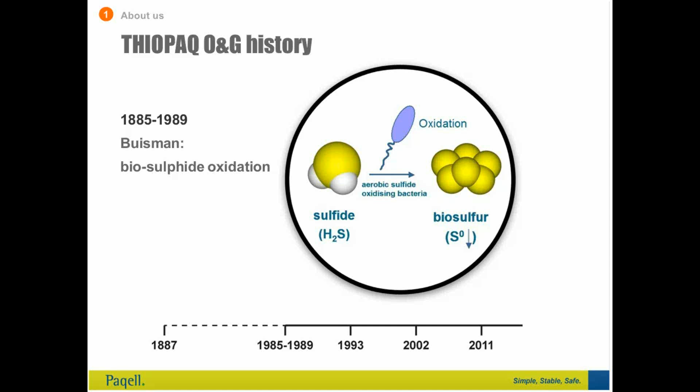In the 80s, the University of Wageningen in Holland researched various types of sulfur bacteria and established that sulfur oxidizing bacteria could indeed live, grow, and multiply off the oxidation of sulfide in a controlled environment.

It was our shareholder Paques that first piloted THIOPAQ biological gas desulphurization in the late 80s, after the Dutch University had established proof of principle a few years before.

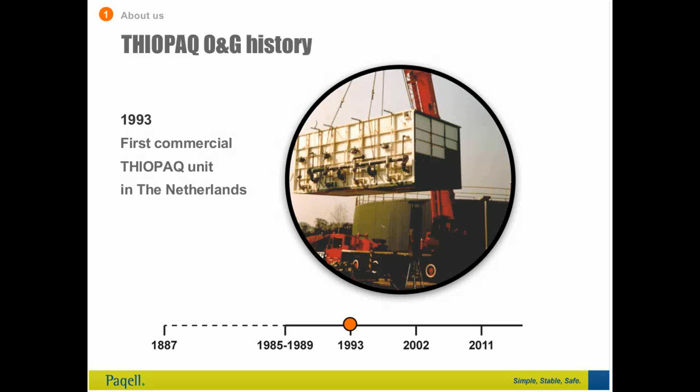Paques had been searching the market for more affordable and easier to operate systems to treat the biogas produced in their anaerobic wastewater treatment units, until they came across this biological treatment option, which they decided to develop into a commercial installation themselves. This picture shows the first crude bioreactor, still rectangular rather than the cylindrical design adopted immediately after.

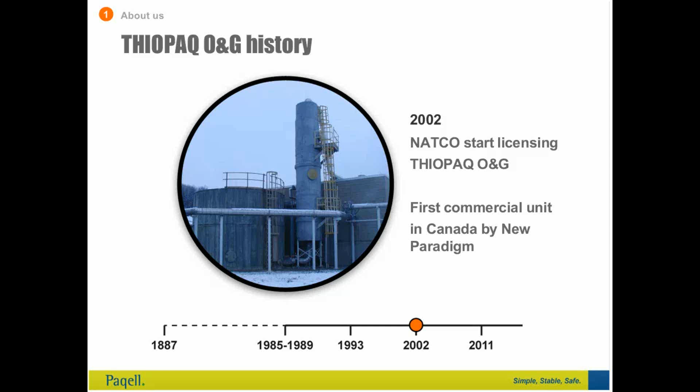Eventually, the first commercial unit on natural gas was taken in operation in 2002. And this picture of the unit clearly shows the insulation blanketing, since Canada can be pretty cold in winter.

Between 2002 and today, the number of THIOPAQ O&G units steadily increased to about 10, with many more in the design and quotation stages.

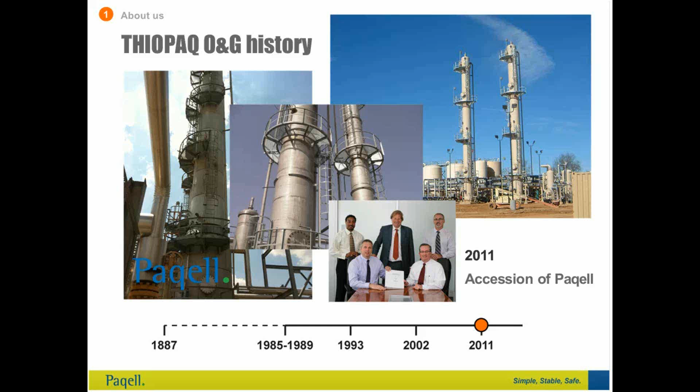The picture in the middle was taken to celebrate the partnership with Cameron in 2011. The same year, Paqell was established. Paqell is located in Amsterdam, the Netherlands, and the reason for its creation was to put more focus on marketing and further development of the THIOPAQ technology.

Now, maybe an insult to your intelligence, but just for those of you who are new to gas treating, the question: why remove sulfur from gas in the first place?

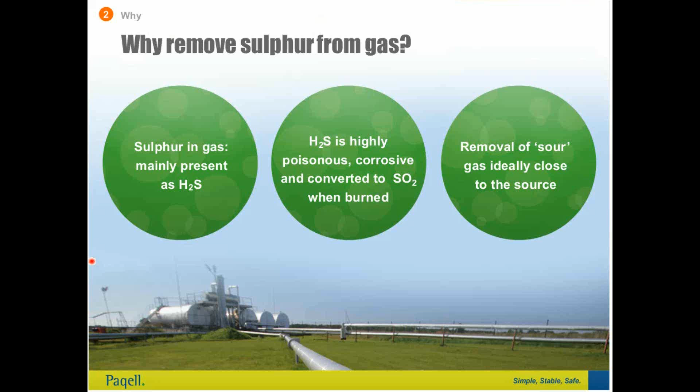H2S is very harmful to people and equipment, and it also means that desulphurisation at some distance from a sour source is very expensive, as more exotic materials must be used and additional safety measures need to be taken.

Most sour gas is of one of these types. Acid gas, of course, could originate from any gas fed into the amine unit in question.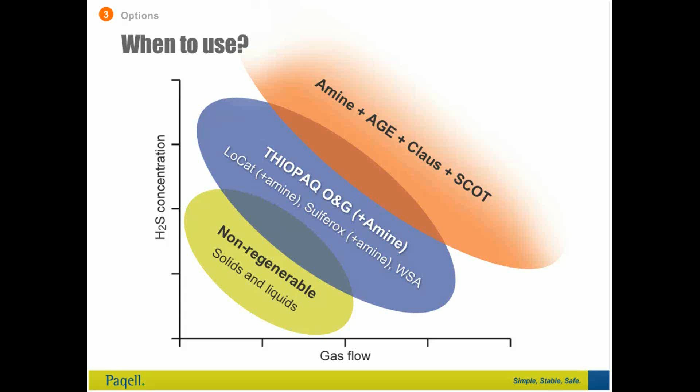Here's some numbers divided in lean cases, that is where the off-gas of an amine unit would have an H2S concentration lower than 30%, in which case a regular Claus burner would be unable to reach a certain temperature.

And rich cases, which contain more than 30% H2S in the amine off-gas, enable the construction of a very simple Claus unit, which really lowers the level at which a Claus-based lineup can be competitive.

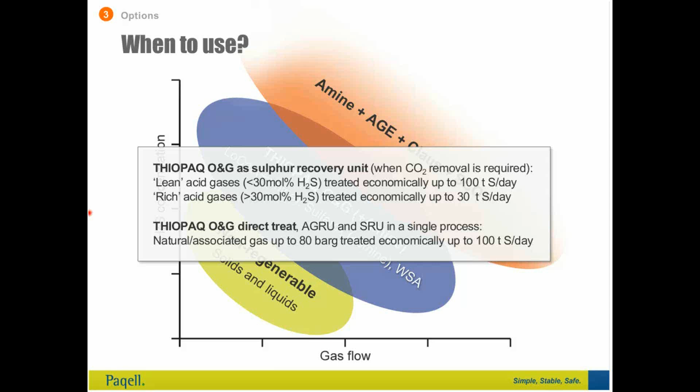For those cases where CO2 removal is not required, THIOPAQ can apply directly to the feed gas, in which case it can be used up to 80 bar and economically up to 100 tons a day.

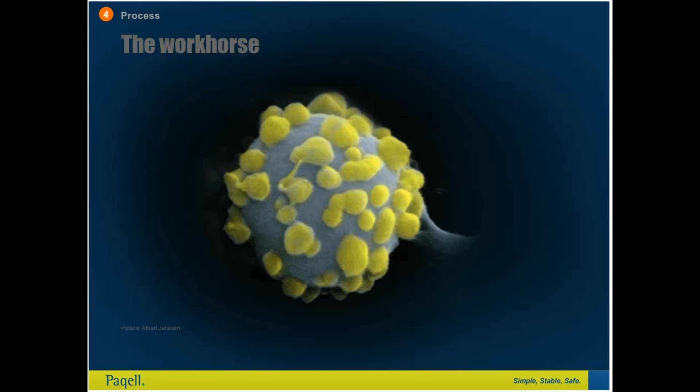The surface of the body is a membrane. They absorb the sulfide through their body membranes and excrete the elemental sulfur. You can clearly see the yellow sulfur nodules on the outside. We've enhanced it a little bit to make it clearer, but this is really how it works.

The process liquid is present throughout the system, and it contains over 97% water. The rest is caustic, sulfur and bacteria. The liquid is basically present everywhere throughout the system.

The system is operated at a pH level between 8 and 9. The H2S is driven into the solution to become HS- sulfide. The action is really similar to what happens in a conventional caustic scrubber.

The sweet gas exits from the top of the absorber and is ready to be used or processed further. The bacteria present in the process liquid are not active at this stage, as there is no oxygen present in the absorption column. They are in fact just passengers coming along for the ride.

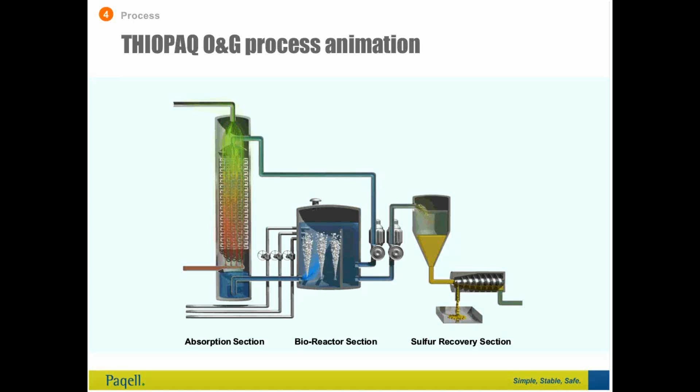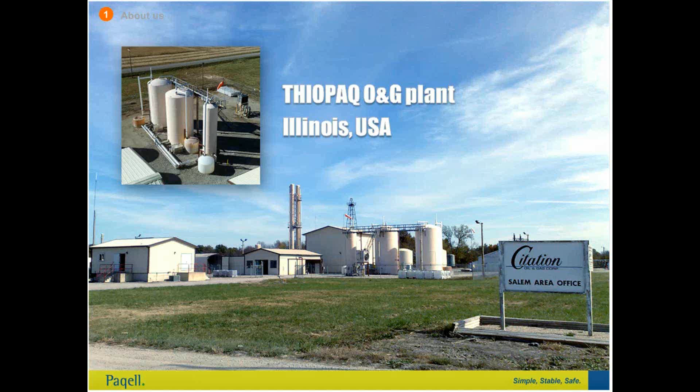As pictures mean more than 1,000 words, here is a THIOPAQ unit treating associated gas in the USA. The load is approximately 1.5 tons of sulfur per day. H2S is removed to less than 2 ppm. Heavier fractions present in the gas are recovered first as NGLs. The methane is sent to the local gas grid. As simple as it may be, this unit actually runs 60% of the time unmanned, evenings and weekends mostly.

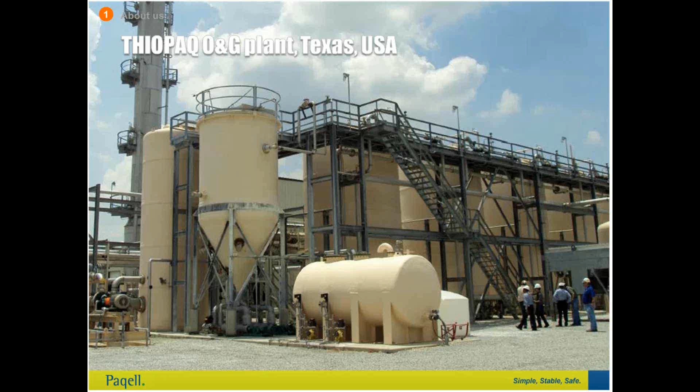This is a slightly larger unit with a design capacity of 10 tons per day. This THIOPAQ O&G actually treats off-gas from an amine unit, as the amount of CO2 had to be reduced before the gas can be sold. For maximum flexibility, a total of 5 smaller bioreactors are used, visible in the forefront.

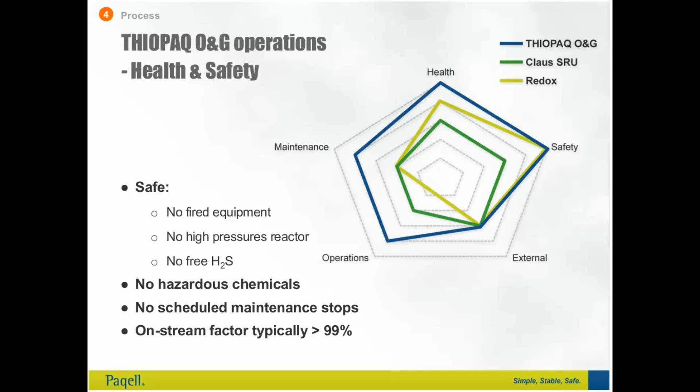About HSE exposure, THIOPAQ operations. Recently, a so-called hazard safety study has been executed to compare the impact on safety and other variables, such as maintenance, operations, and health, executed by a third-party study. It compares other systems, redox, traditional Claus-SCOT lineups, to THIOPAQ, across a total of 5 variables. And you can see that THIOPAQ O&G does perform better, or at least equal, to any of the others on all points. Certainly an interesting outcome, as not all of the reasons to choose a particular technology for a project are purely financial.

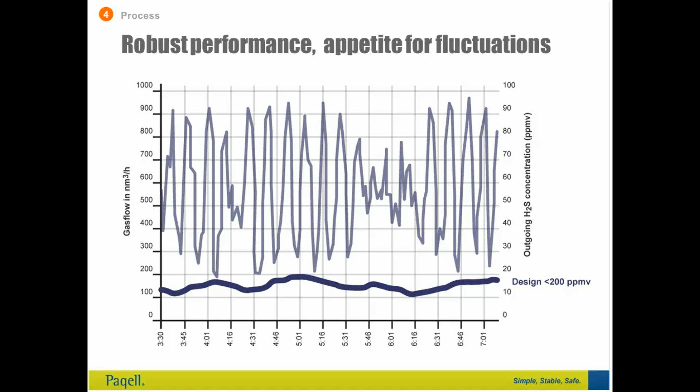For instance, the capacity to treat a variation in gas flow or sulfur content can be a very important factor driving customer preference. This is a quite extreme set of fluctuations. Yet the THIOPAQ unit in question keeps H2S below 20 ppm at all times, well below its design value of 200 ppm. In fact, any THIOPAQ O&G unit can treat sulfur loads from as low as 0 up to full design load. A really nice thing to have, you will agree.

If we look at cost associated with operating THIOPAQ, the simplicity really shines through here and results in a great transparency of costs. Looking at operational costs, the determining factors are caustic consumption, about 250 kilos per ton of sulfur removed, electricity for pumps, motors, cooling, and to a lesser extent nutrients. The nutrient cost itself amounts to about 30 euros per ton of sulfur.

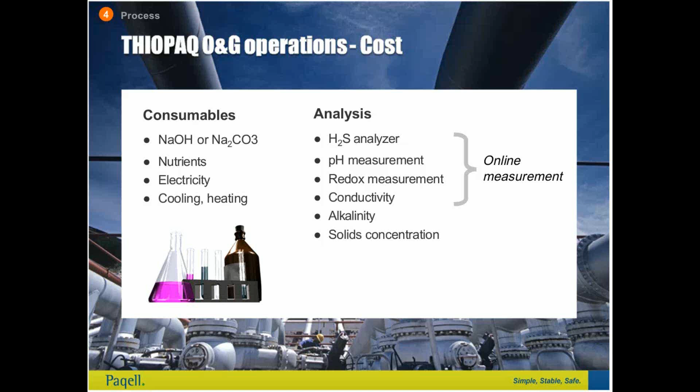Most measurements are online, leaving an operator to do a visual inspection round once or twice a day, measure alkalinity, and draw a sample into an Imhoff cone. The Imhoff cone is used to assess the amount of sulfur in the system and to inspect sulfur formation. On gas production sites, there is typically no need to hire additional staff for the THIOPAQ O&G operation. Apart from the need to service rotating equipment, there is no need for scheduled maintenance, which creates an uptime of well over 99%.

Over 99.9% of the H2S in the feed gas is captured in the process liquid, making THIOPAQ a very effective system at keeping sulfur out of the treated gas and out of any emission to air. Sulfur is recovered mainly as elemental sulfur. A small part is oxidized all the way to sulfate.

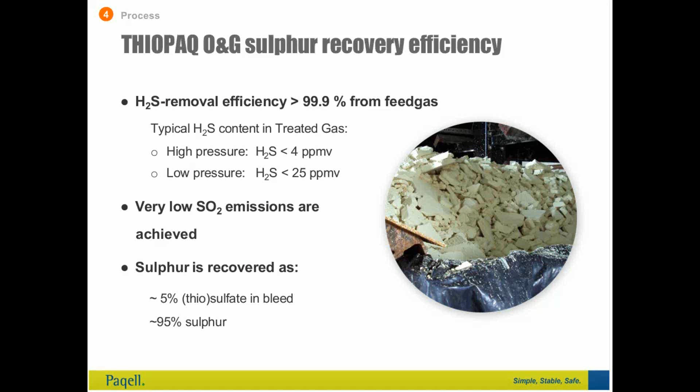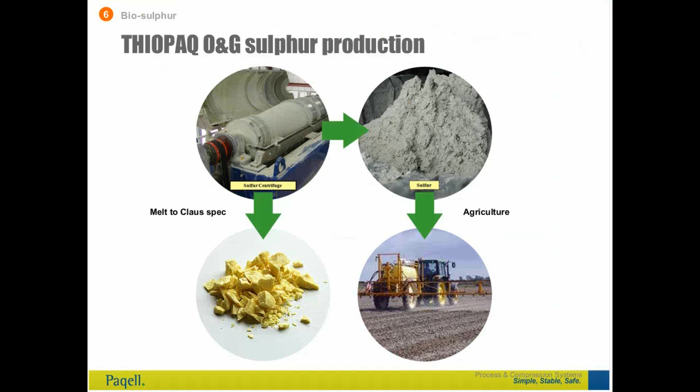The picture shows biosulfur produced with a filter press, a very dry, cake-like sulfur. As mentioned earlier, the sulfur is produced as a relatively dry sulfur cake. The slide shows the centrifuge and the cake at the top. When a sulfur melter is included, a Claus quality pure sulfur can be produced, bright yellow. Actually, 3 THIOPAQ O&G units have such a melter installed presently.

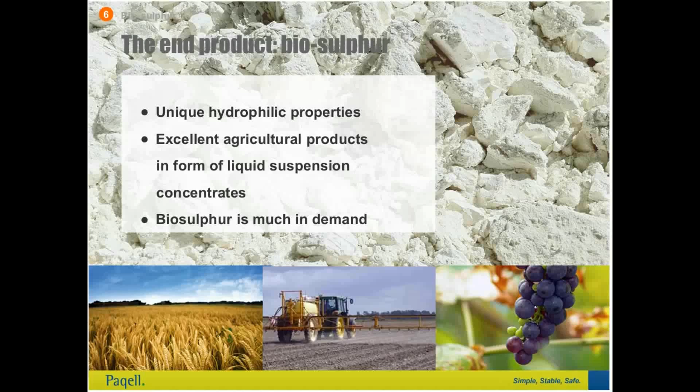Our favorite, however, is biosulfur applied in agriculture. The biosulfur produced by the bacteria has a unique hydrophilic character and a very fine particle size that makes it a good ingredient for a range of sulfur-based liquid suspension fungicides and fertilizers. Actually, sulfur produced in the Texas unit we have shown earlier is shipped all the way to the UK and ends up on English farmland.

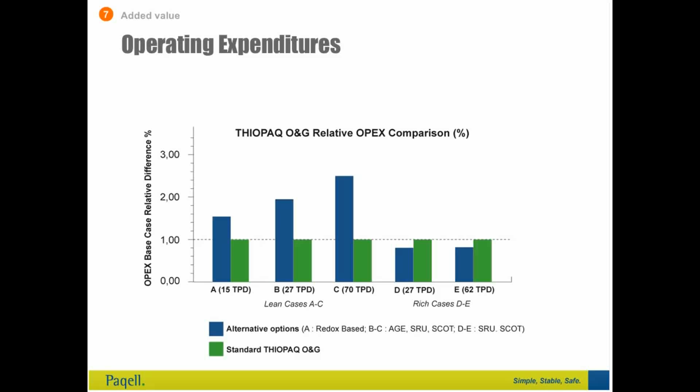So, especially for refineries and petrochemical installations, the value of the steam produced by a Claus waste heat boiler may change the operational cost substantially. But as we focus on natural gas and associated gas today, this is a pretty true picture.

Now moving over to capital expenditure. How does this simplicity translate into CapEx? Again, the graph provides a relative CapEx comparison for the same 5 cases as the OPEX slide we just studied: lean cases A, B, and C, and rich cases D and E. It's quite clear that THIOPAQ is lower in CapEx, but it does start to drop off when sulfur loads are higher, especially for the rich cases. Rich cases being, of course, the cases very favorable for traditional Claus lineups, as enrichment units are not required.

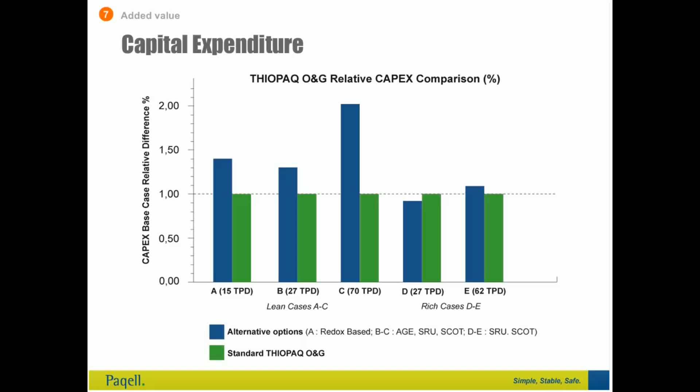These basically are the main things we would like you to take away from this presentation. Of course, the order is not anything in particular. For your project, you may value one benefit higher than the other, but this does sum up nicely the advantages of THIOPAQ, particularly the low cost per ton of sulfur removed. And obviously, this is within the size segment we discussed in the presentation.

The very simple installation, the ability to accommodate fluctuation in both gas flow and sulfur loads, safety - an interesting aspect especially for offshore operations where it's crucial to operate safely. The limited operator attention is highly valued. At the same time, the H2S removal is very deep, and the sulfur produced can actually be used for re-injection, agriculture, it can be melted for Claus specifications, or as it's often done, it can also be landfilled.

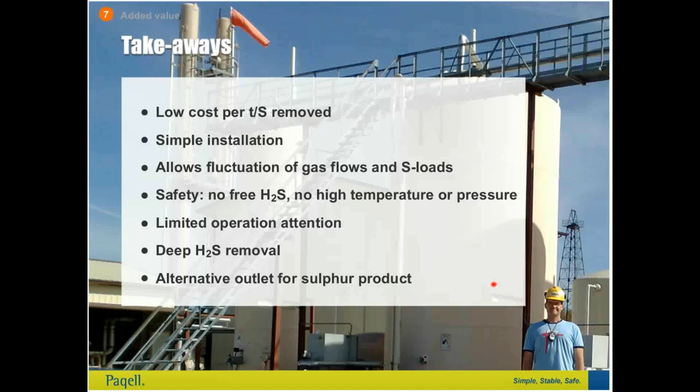Hopefully, we have made you enthusiastic for THIOPAQ. To make things a little bit easier for you, next time you have a potential project and you want to do an initial quick scan, anonymously, without filling out many forms and asking questions, you can do so on our website, www.paqell.com, completely anonymous and instant.